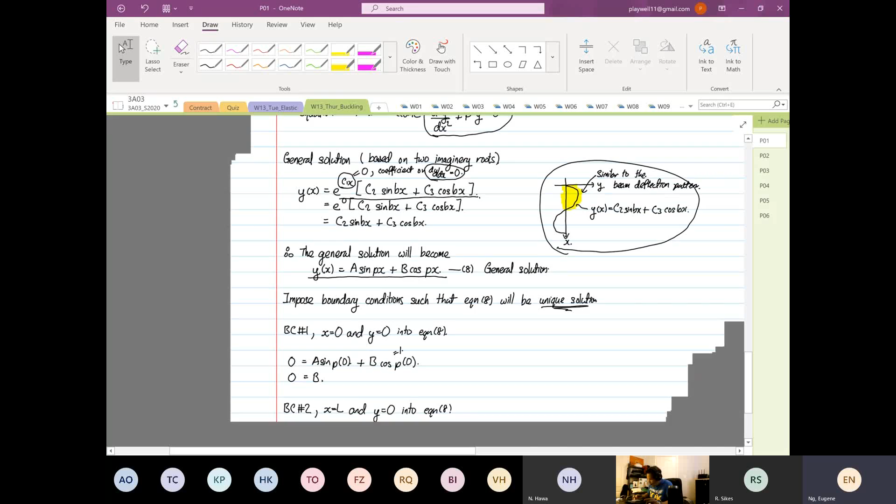Boundary condition. So we go up here, we look. We talked about boundary condition last week also, on Tuesday, right?

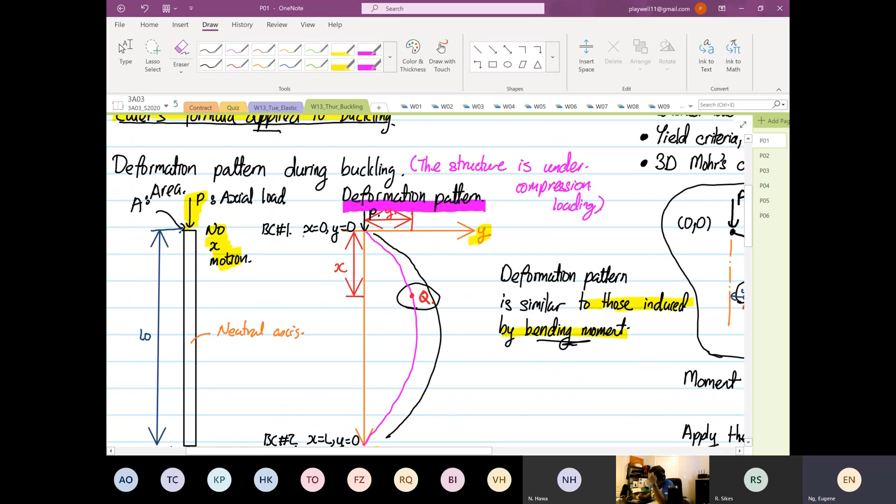So one boundary condition is when x is equal to 0, y is equal to 0. And on the other side, when x is equal to L, y is equal to what? 0. Okay.

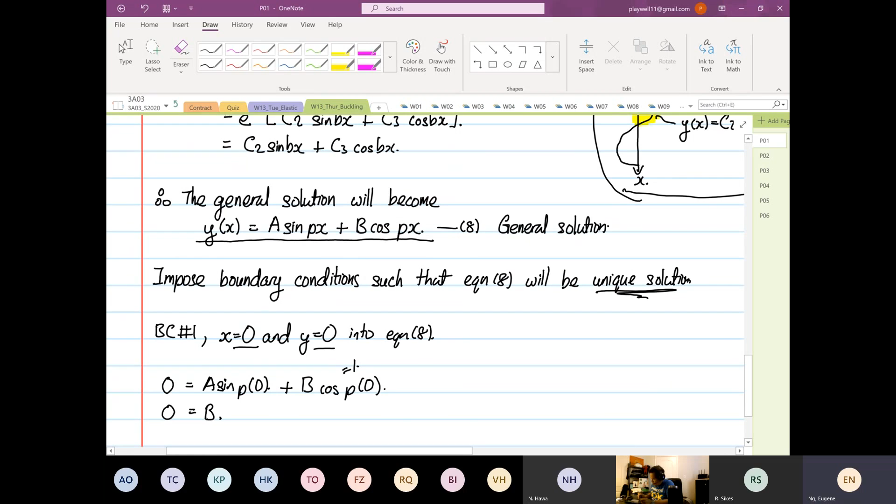From here, we apply when x is equal to 0, y equal to 0. So we realize that the constant b is equal to 0. Then we have boundary condition number 2: when x is equal to L, deflection is equal to 0.

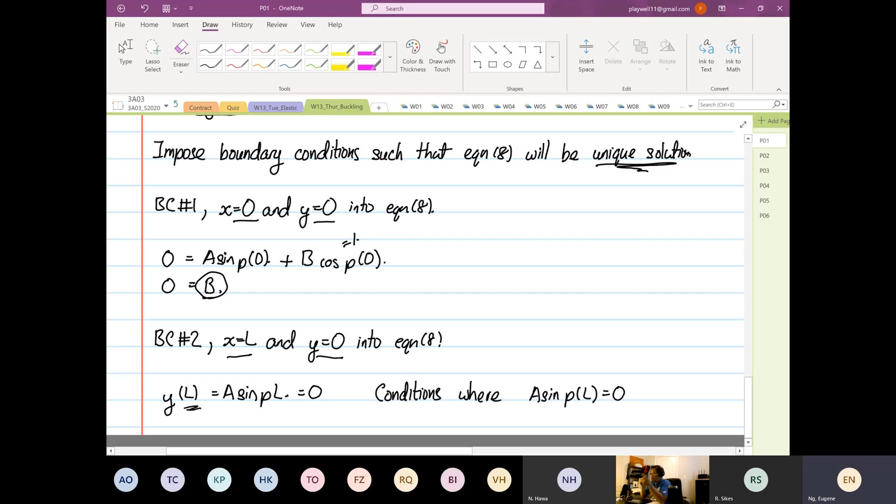So we have this expression where y at distance L is equal to a sine PL is equal to 0. Now, from here, we have to find a condition where a sine PL will be equal to 0.

So this is a pure sine wave. So when this will be equal to 0, is where sine PL, or PL, is equal to 0, or pi, 2 pi, 3 pi, 4 pi, right? That's where sine, the whole expression, will be equal to 0.

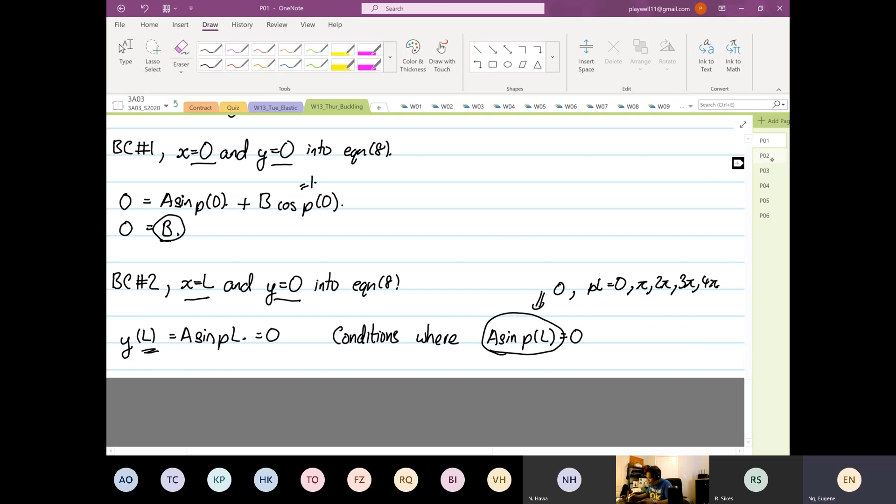So when that's the case, PL is equal to, or P bracket L is equal to N pi, like what I've written earlier. Remember? Pi, 2 pi, 3 pi, 4 pi. So we let PL equal N pi, where N can equal 1, 2, 3, or 4. So sine N pi is equal to 0.

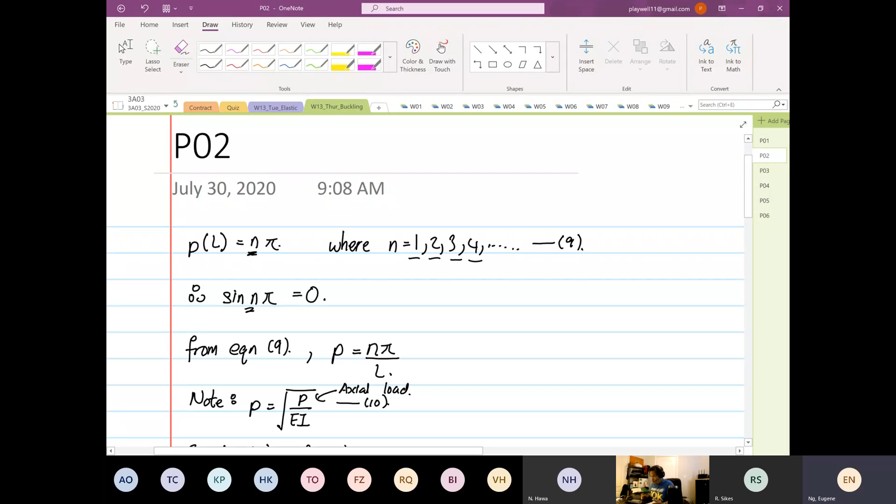So from equation number 9, we realize that P is equal to N pi divided by L. This is from equation number 9. Now this is small p, this is not capital P. So this is small p.

Capital P is the axial load. So note, like what I told you guys before, we have this expression where small p is equal to square root of capital P over EI. So where did this come from? Just to quickly recap.

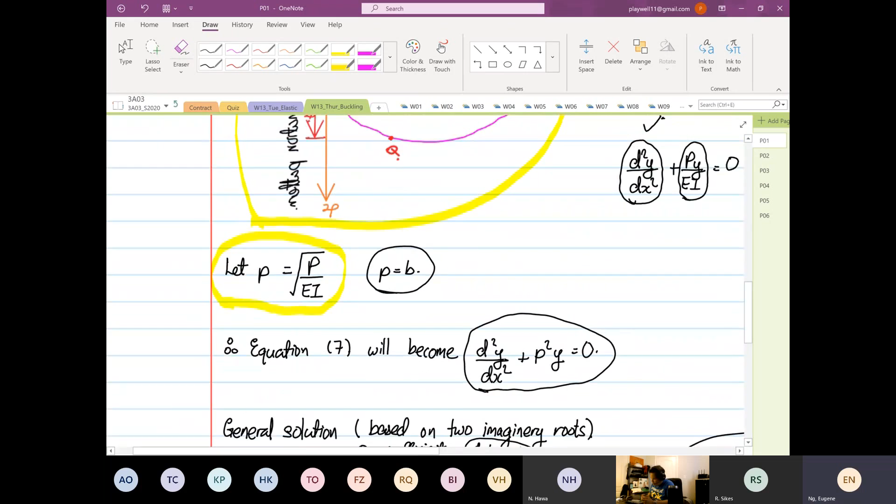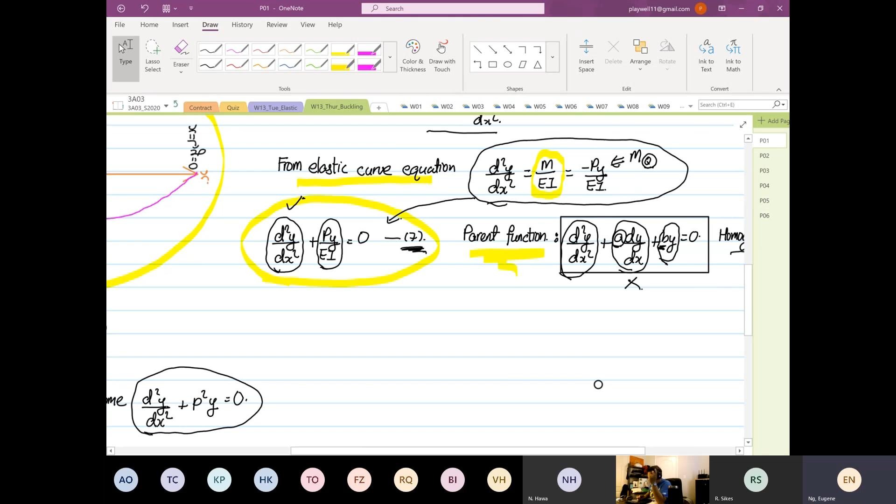This comes from here, like what I highlighted earlier, this expression over here. And how we get to this relationship is because we relate what has been expressed from the elastic curve with the parent function, for the homogeneous equation.

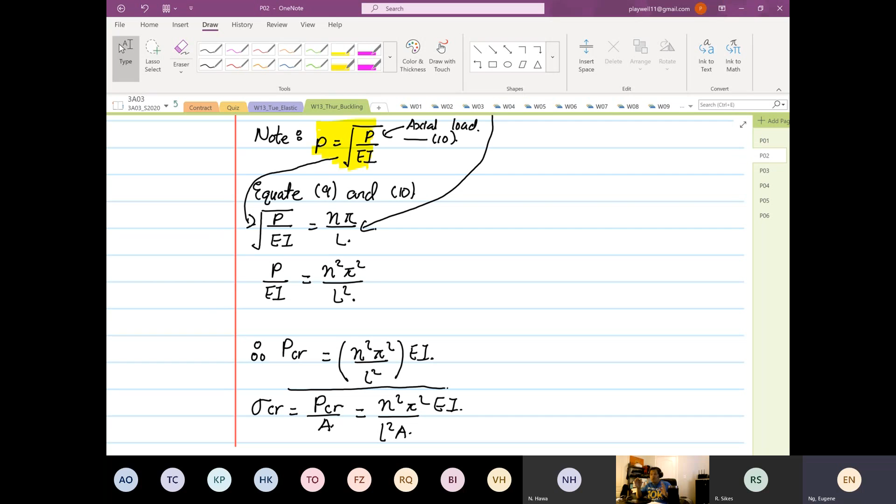Bear with me, we are almost done with the theory. It's still very mathematically based. So from here, the expression where P over EI is equal to N squared pi squared over L squared. So we come up with an expression, or you just rearrange the equation, where the critical load is equal to N squared pi squared over L squared EI. So this corresponds to the critical load. And then we can come up with a critical stress.

We just divide by the what? A, is the cross-sectional area.

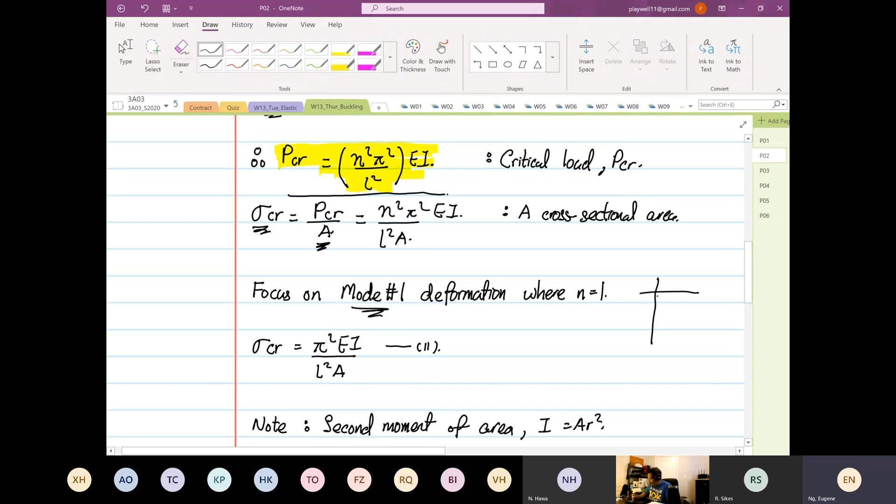So we are going to focus on mode 1 deformation. We're not going to mode 2. Why mode 1? So mode 1, when it deforms in mode 1, it looks like this. So this is mode 1.

Mode number 2, it will deform like this. So this is mathematically, in mathematics. So if you look at, oh sorry, I think I drew an extra one. So it's 1, 2, right?

So the structure will go into mode 1 first. It will go to mode 1, then it will go into mode 2. So by the time, in reality, what does it mean? When it hits mode 1, the structure will buckle already.

It will not be able to hit mode 2 at all. So you can see, if I bring this half, where I'm going to highlight, in reality, it will buckle in this pattern or deformation pattern. It will not reach this pattern at all. You will not see the bottom part at all. You only will see mode 1, you won't get to see mode 2. So that's why we're going to focus on mode 1 deformation.

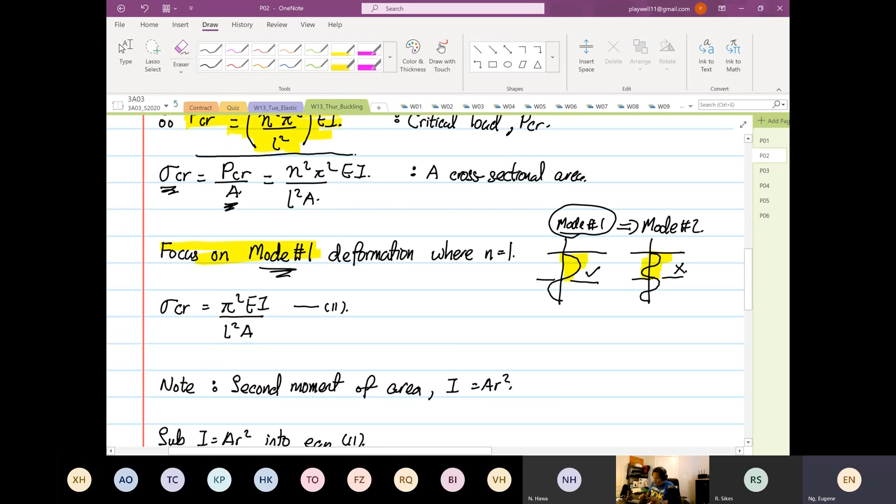So you have this expression where equation 11, the critical stress is equal to pi squared EI over L squared A. And then we are aware that I is equal to A R squared, where R is the radius of gyration.

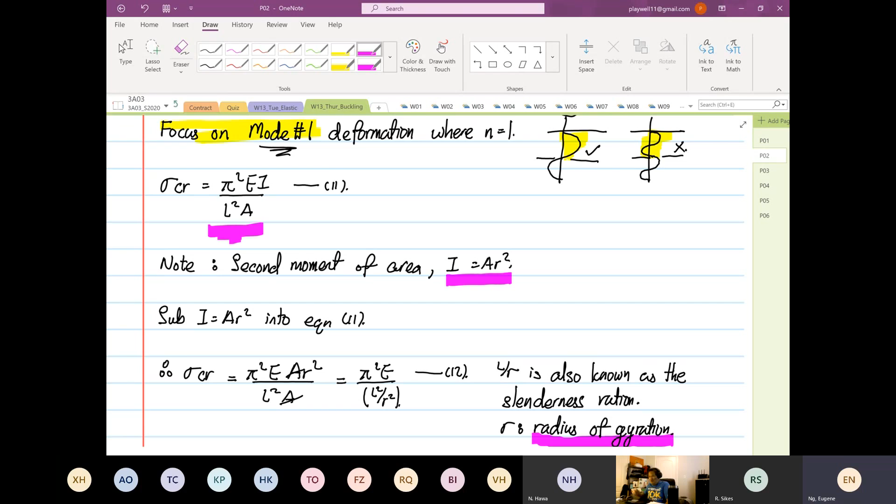It's okay, because I don't have a clue physically what a radius of gyration is. Really, not a clue at all. But we know that I is equal to AR squared, so when we substitute that formula into pi squared E, we replace I with AR squared. So we substitute AR squared, and you have L squared and A, and finally we get pi squared E divided by L squared over R squared.

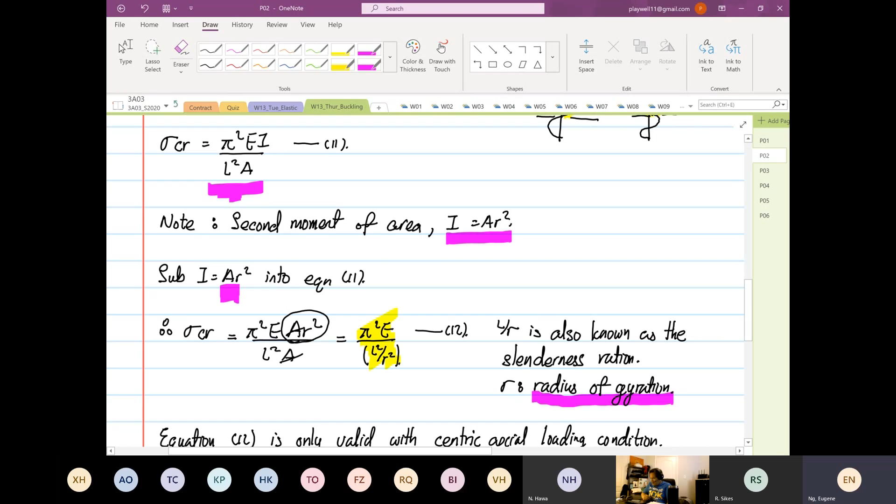So from equation number 12, it's only valid for centric loading, centric axial loading. When we say it's centric axial loading, the load is applied on what? On the neutral axis. So what do I mean by centric?

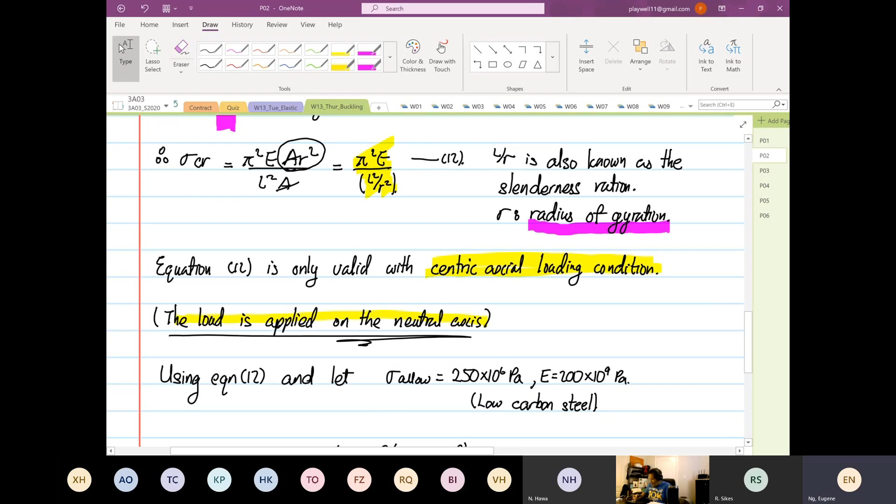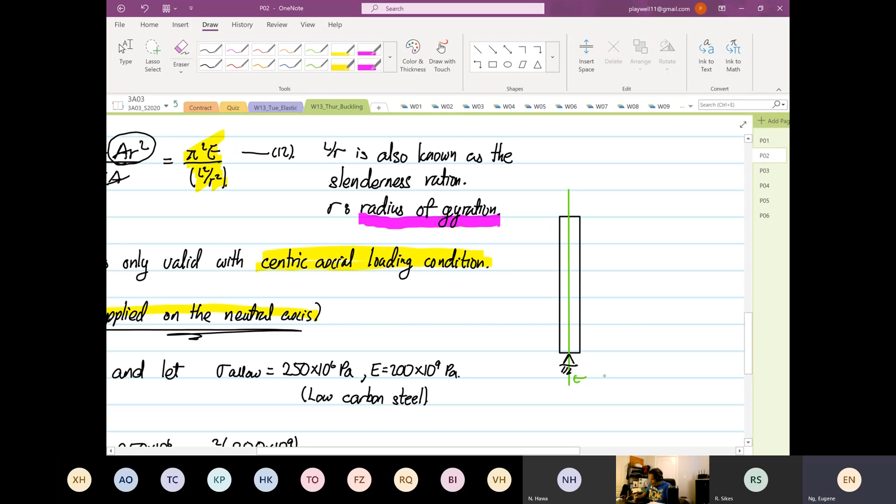I'll express this again. This equation that we have just applied, I'm going to draw a beam. This is our beam, one end is pinned, and then I'm going to draw our neutral axis. So the green is our neutral axis, and then we have a load P applied. The load is Px, because that is our x-axis. So this is applied on the neutral axis.

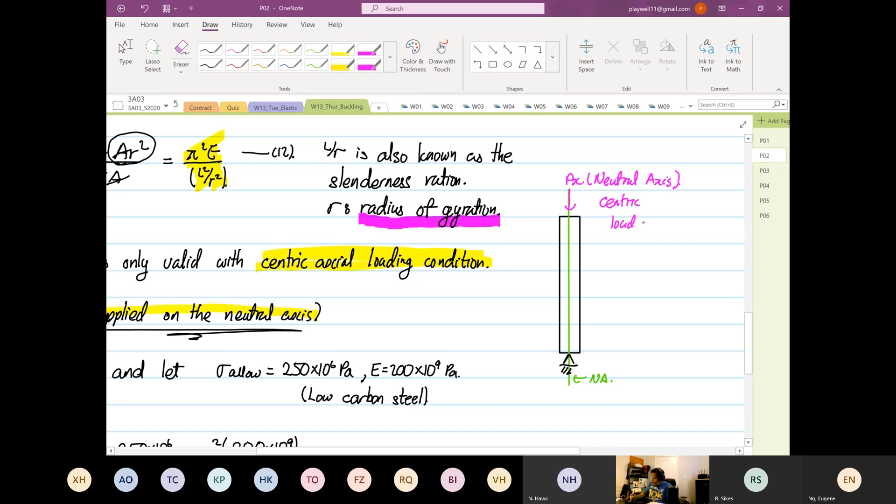So this is what we call centric loading. What we have written down here will only work for centric loading. But then when our loading becomes this way...

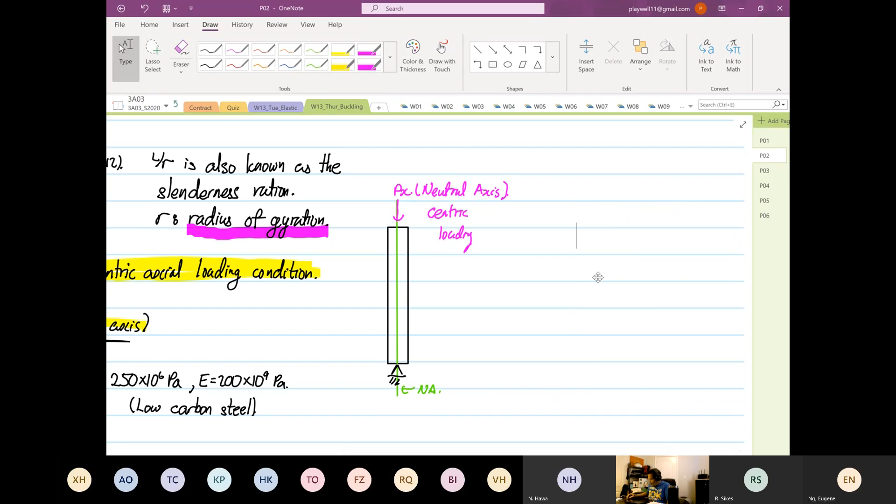Same structure, neutral axis is still in the same position. So this is our neutral axis. Now if we have another attachment by the side - wrong color, sorry - if we have an attachment on the side, and we have a load still applied in the x direction, this is eccentric loading.

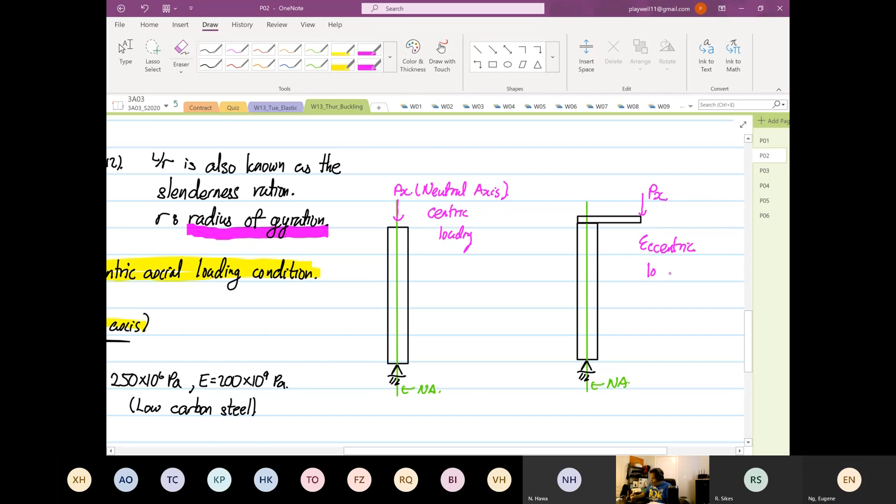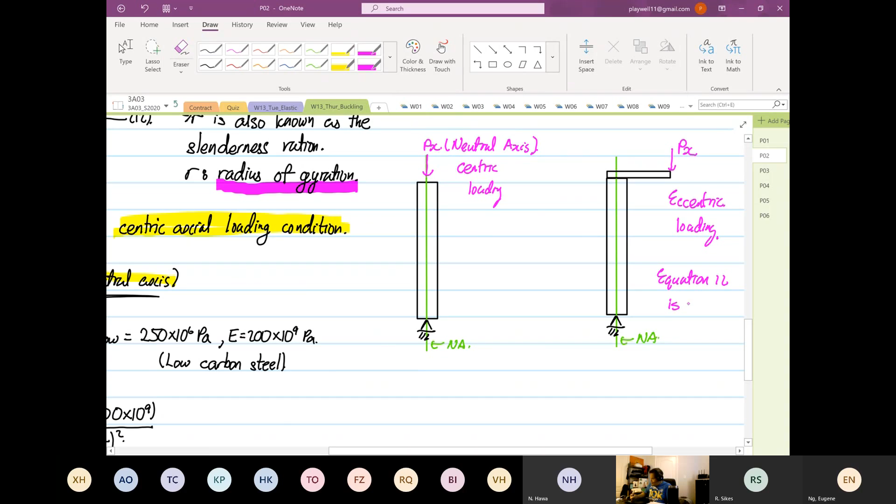So for this case, equation number 12 is not valid. It is only applicable for centric loading. You'll probably learn eccentric loading in 3E05 - not probably, I'm very sure you'll learn this when you're doing your 3E05. But you need to know the background first.

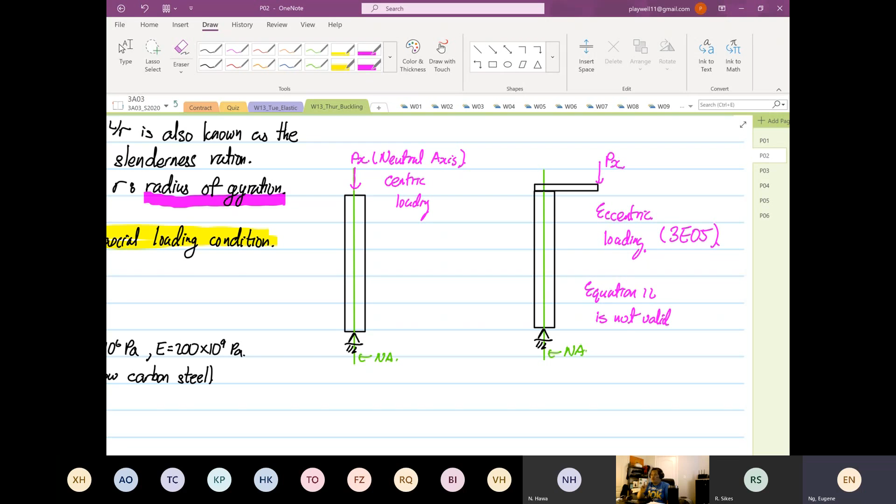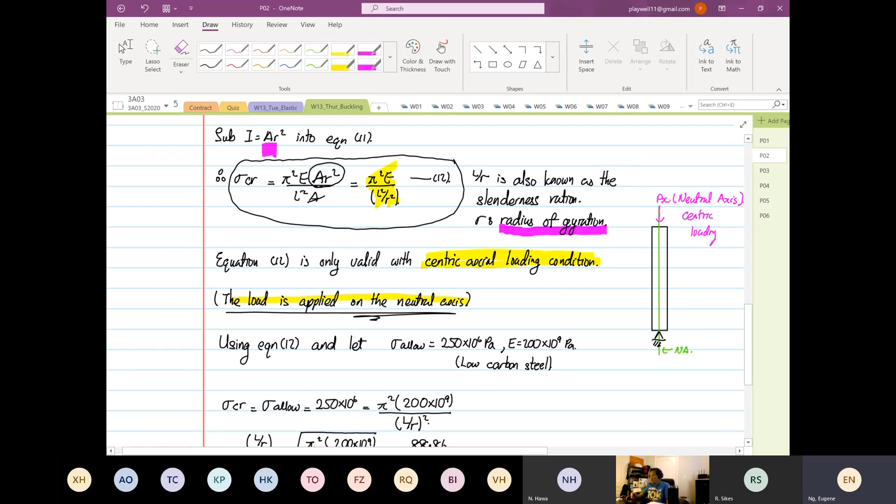So now, using equation number 12, we have derived an expression where critical stress is equal to pi squared E divided by L over R squared.

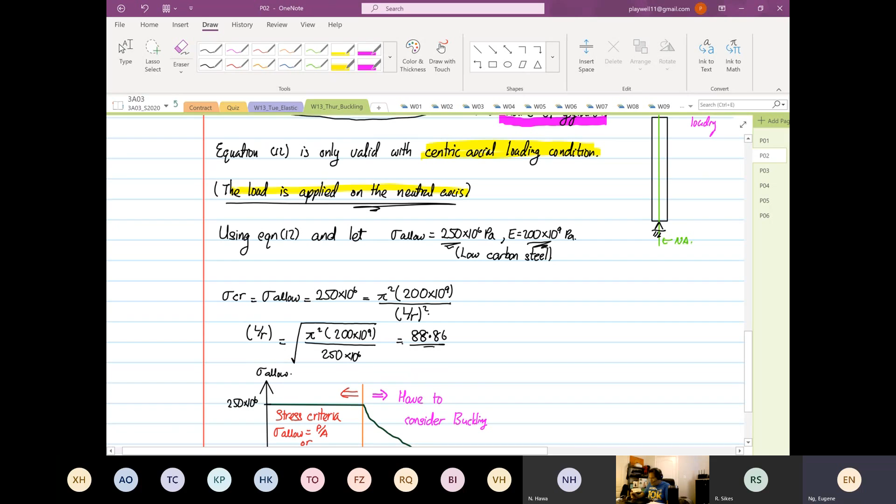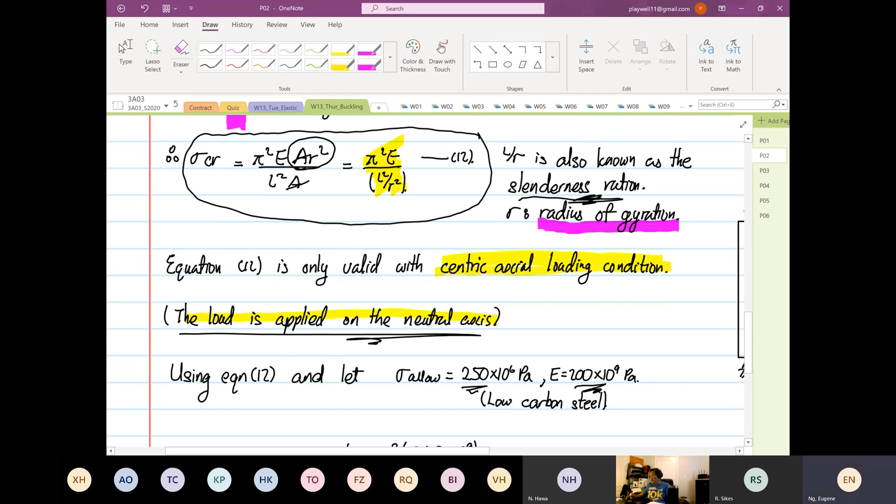So now we are going to let the allowable stress be 250, the Young's modulus be 200. We substitute it into equation number 12, and we come out with an L over R ratio - this is known as the slenderness ratio. So the slenderness ratio we calculate is 88.86.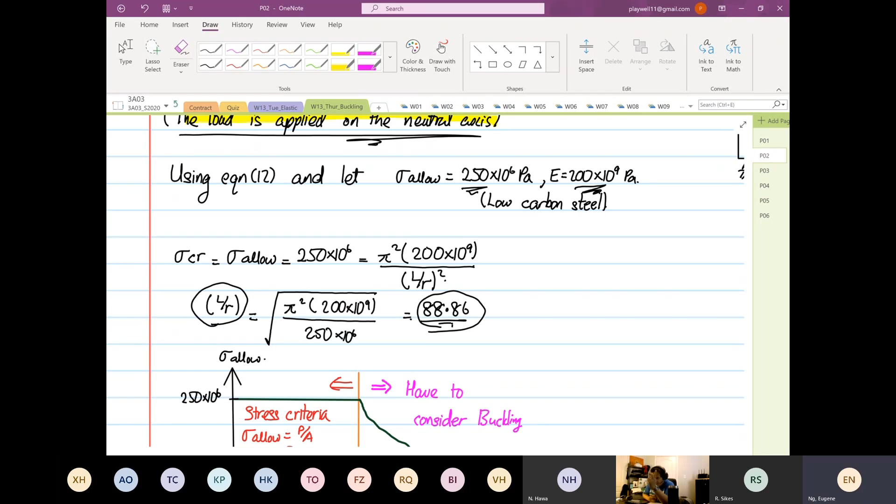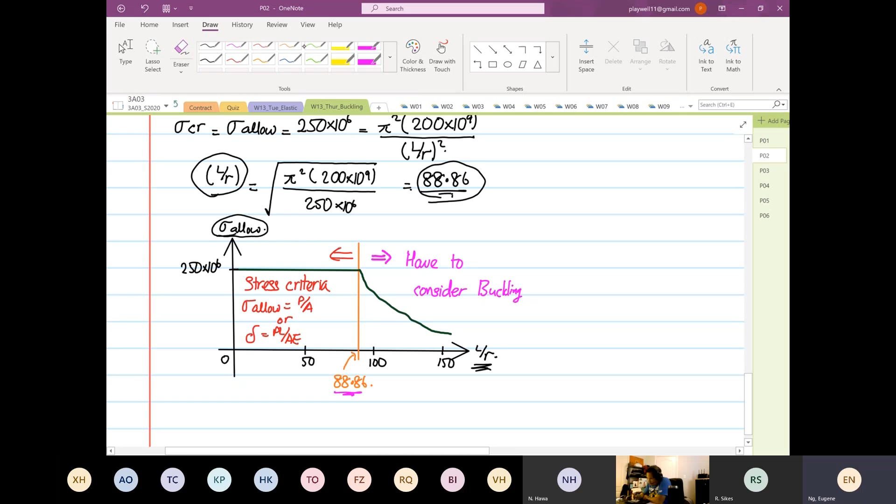So what does this actually mean? So we plot a graph where the x-axis is equal to L over R, and the y-axis is stress allowable. So from here, we have calculated a slenderness ratio, an L over R ratio, to be 88.86.

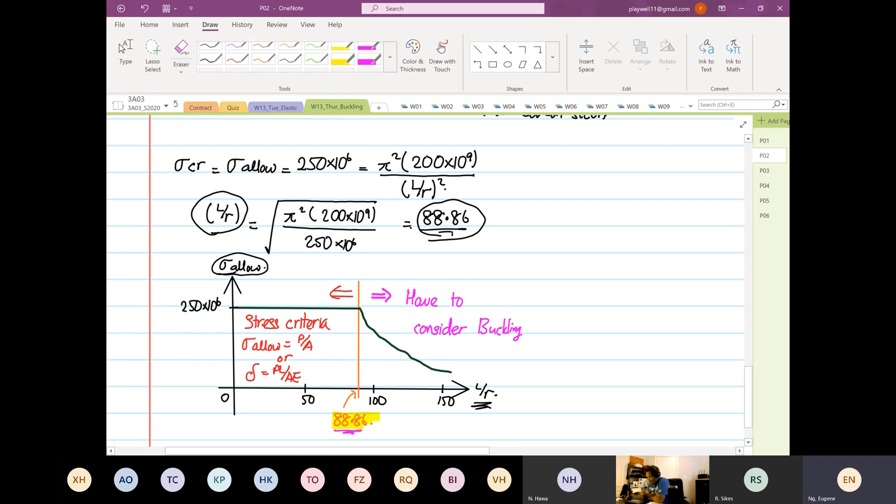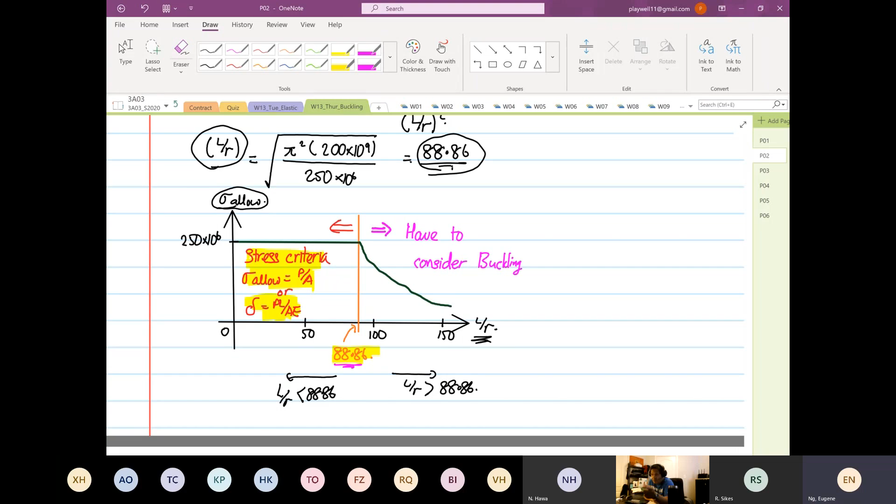So what does this actually mean? If your slenderness ratio is less than 88.86, it's on this side. So if L over R is less than 88.86, the stress criteria you have to design your structure with is either force divided by area, or deflection equal to PL over AE. However, when your L over R ratio is greater than 88.86, you cannot design your structure just based on force divided by area or PL over AE anymore.

You can't. You have to consider buckling. If you don't consider buckling, your design is flawed, because if your slenderness ratio is greater than that, the structure will not hit the stress limit, but it will buckle.

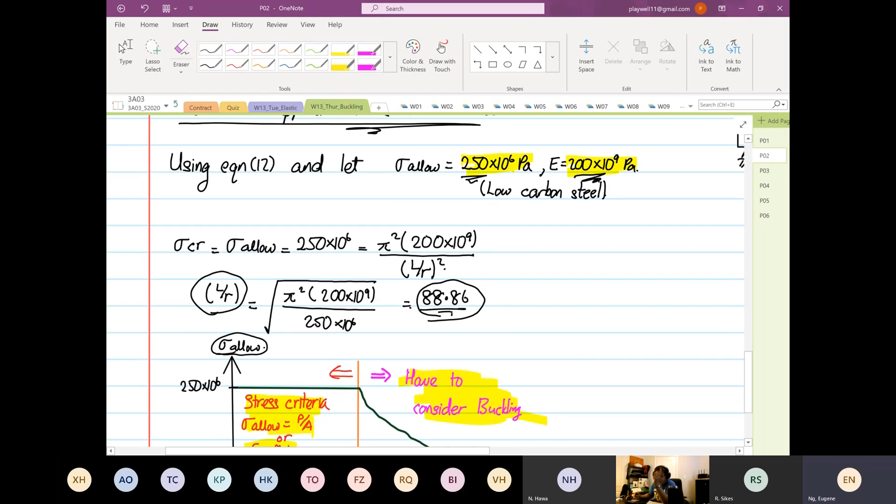So what we are trying to prevent is the onset of buckling - when will buckling initiate? For this case, based on the allowable stress and the Young's modulus, we know what the critical slenderness ratio is. So we cannot apply P over A or deflection equal to PL over AE anymore. You have to consider buckling.

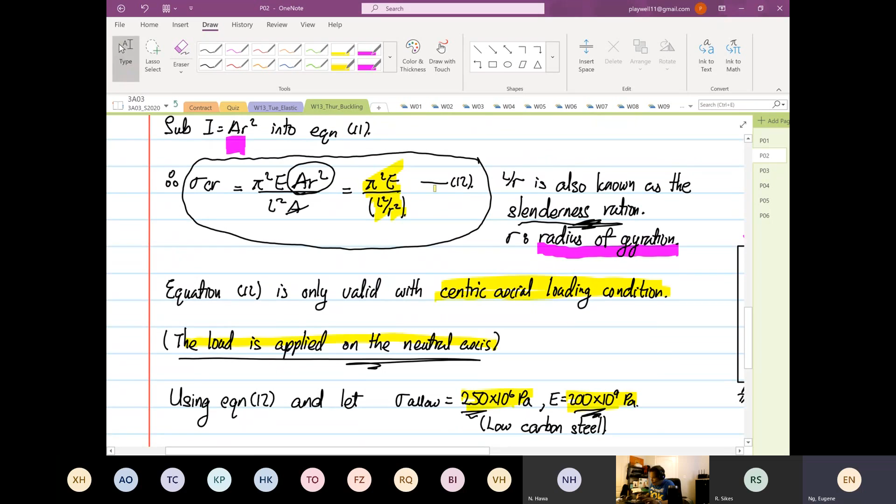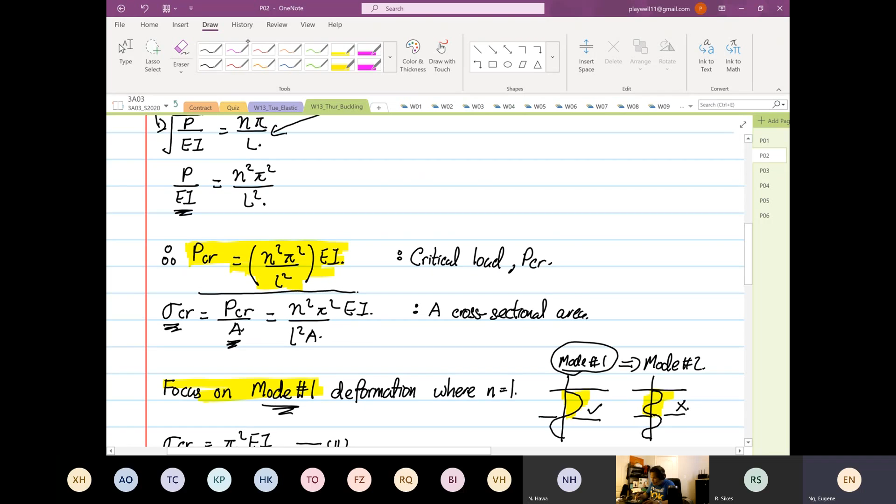So some will say, hey, what do you mean we have to consider buckling? You have to apply equation number 12, or this expression where the critical load is equal to pi squared n squared - no sorry, n over here will always be 1 - over L squared, multiplied by EI.

I think that's enough theory for now. There's some more theory to go, but I'm going to section it out. I want to show you how simple it is to do this - it's not difficult at all.

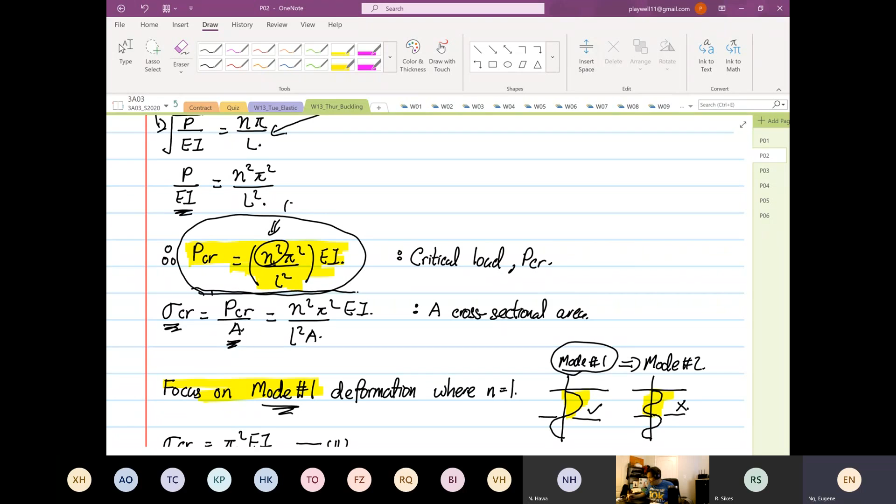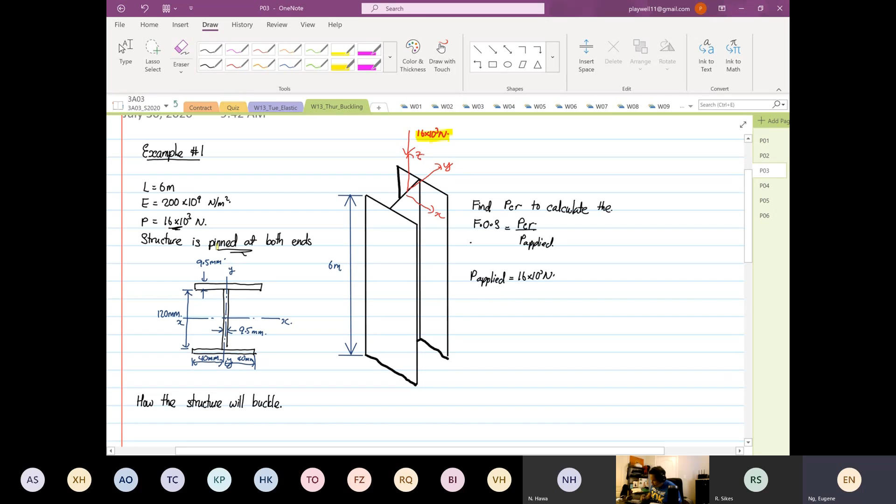So let's do an example - this is example number 1. We have a beam that is 6 meters long. Young's modulus is 200 gigapascal. The load P is acting exactly on the z-axis that I have just drawn, and it is 16 times 10 to the power 3 Newton. Now the structure is pinned at both ends. So what do we mean by...